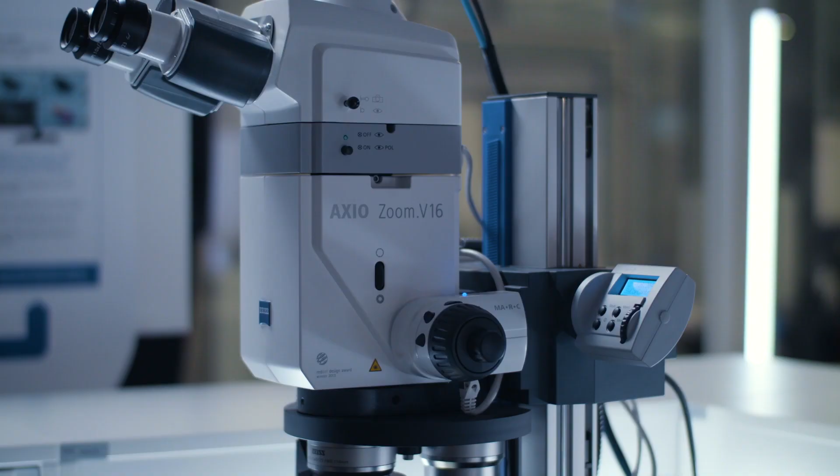In the last 2 episodes, rock number 5 and number 6, we introduced you to the world of Zeiss optics. In this episode, we will focus on the topic of defect detection. To get a better understanding of Zeiss defect detection, today I will talk not to one, but to 2 expert guests. My first guest is Head of X-Ray at Zeiss, welcome Petra Schmidt. Hello Petra. And my second guest is connected with us from the United States, he is the Head of Additive Manufacturing Process and Control at Zeiss, welcome Marcin Bauza.

Hello everyone. Hello Marcin. Marcin, I start with you, what is defect detection all about?

So in mass production, we are creating a lot of parts. It is important to find if all the conditions are met. Sometimes parts may have critical issues on the surfaces or internal issues, and we have external defects or cosmetic defects on the parts. And also we will have functional defects on the parts that could be on the surface or internally.

Okay, well Petra, let's focus on functional defects. What exactly are we talking about? So when it comes to functional defects, they can be actually both on the surface of the part or hidden inside the part. And they influence largely the stability and the lifetime of the part. Very important with functional defects, it's not only to find them, but also to set them into the right context.

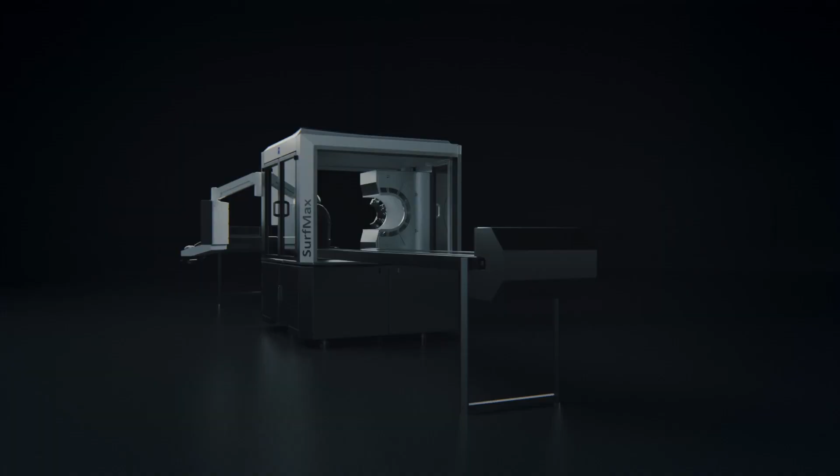So this is Zeiss SurfMax. Marcin, what have we basically just seen? As you mentioned, SurfMax, it's that high-speed inspection of surfaces. We're not measuring the surface, we're looking for surface defects, we're looking for cosmetic appearance, so ensure that the product looks good, and that's the technology that's going to support this.

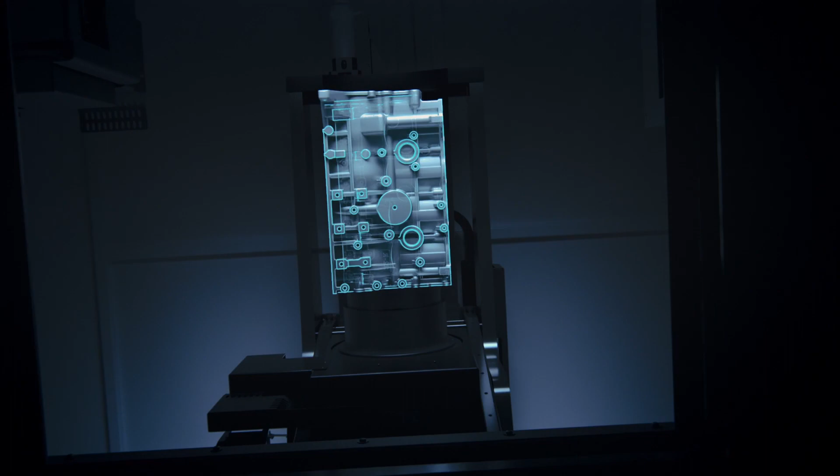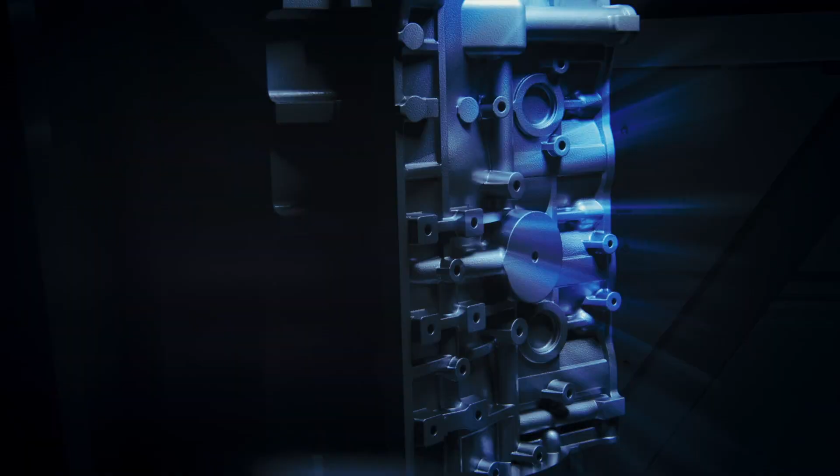Okay, thank you. Well, now it's time to take a sneak peek of the second technology. Zeiss VoluMax 9 Flash. Same question for you Petra, what exactly have we just seen? You have seen the inline solution for large aluminium casting parts, 100% inspection, finding the critical defects in no time.

All right, so Zeiss VoluMax and the SurfMax can let you know if there are any defects on a part. But can they also help you in identifying the type of defect? Well, you hit on a very, very important point, because both solutions can not only find the defects, but they can classify what type of defect it is. As in a 3D volume, for example, pores, shrinkage holes, cracks, and so on.

Marcin, would you like to add anything? Absolutely, as you can imagine, the defects on the surface will be a little bit different. We absolutely can detect many different kinds of defects, but the typical ones are scratches, dents. If you're doing some coating process, those could be fingerprints, also polishing problems, orange peels, and paint runs. And all of those can be classified and named properly.

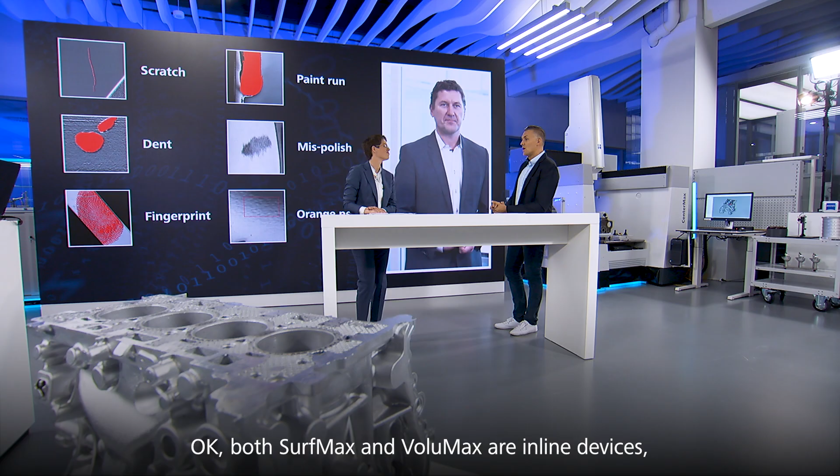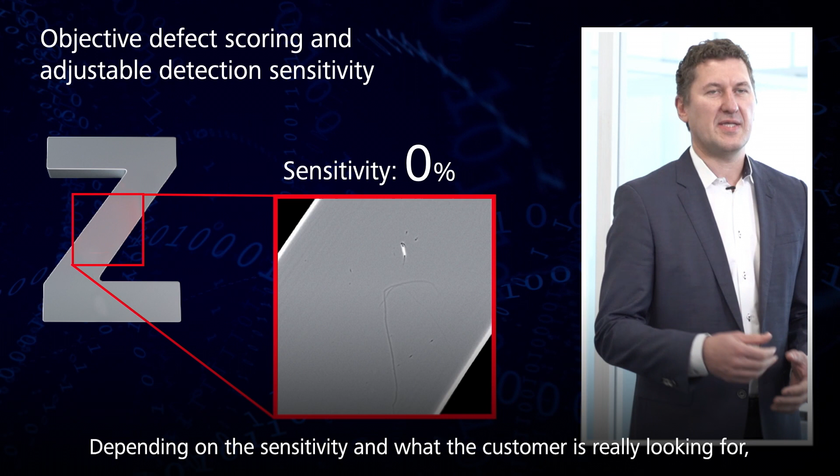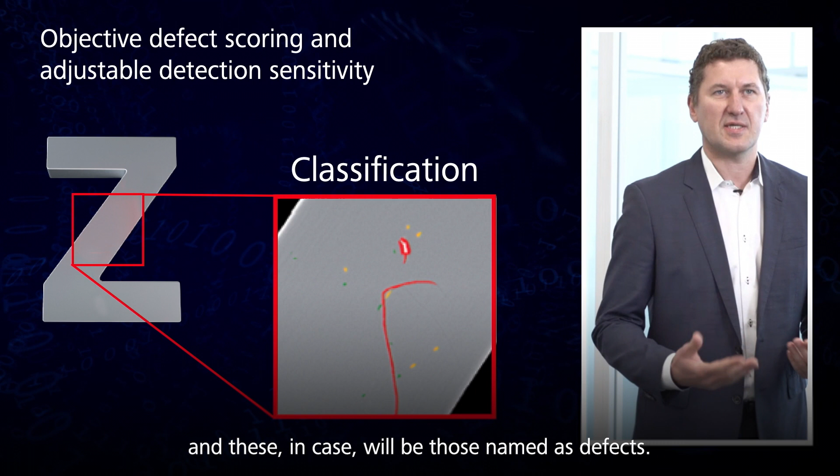Okay, both SurfMax and VoluMax are inline devices. Does that mean that each and every defected part gets automatically rejected? At first we're looking, does the part have any imperfections in the surface? As we can imagine, we can see smaller or larger imperfections, and now depending on the sensitivity and what the customer really is looking for, we will classify them as okay imperfections or acceptable, or not okay imperfections, and in this case will be those named as a defect. And yes, those defects will be rejected and sorted out.

So actually, once one customer told me, until you showed me the inside of my part, I could sleep actually really well. Now that I've seen how many defects are in there, I can't sleep anymore. Luckily, we had a software solution for him for distinguishing the critical defects from the non-critical defects that makes him sleep again.

Okay, but is it absolutely necessary to check each and every part? Wouldn't it be enough to do sample testing? The problem with defect detection, they are typically random. So whether we like it or not, we have to do it at 100%. We have to see every single part. We have to trace down what is really happening. And this is the complexity here.

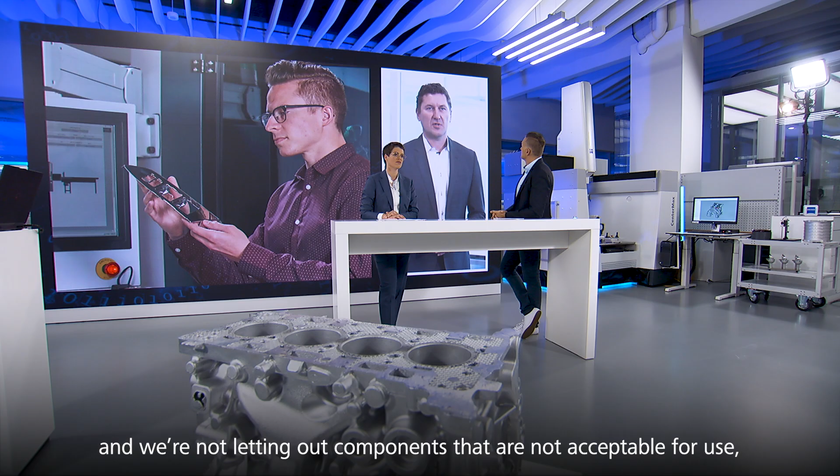And also with defect detection, we need to look at overkill and escape. We want to make sure that we're not detecting something too severely on the parts that are acceptable, and we're not letting out components that are not acceptable for use. So those are the escapes. And also, in a lot of industries, there are actually quality standards that ensure the safety of the product for us as end users.

This is why our customers really inspect 100% of the parts. In addition, once you learn something about the defects in your part, you can also improve your production process to produce fewer bad parts. That means early detection of defects, less scrap, reduction of costs.

Okay, well, all of this makes sense, but isn't it very time consuming if you control and inspect every part? One would think that this would slow down the entire production process, which is the last thing you want. The production cycle time is given, and we find a solution for the customer that inspects the product within the cycle time.

Martin, anything to add? As Petra mentioned, the inspection already is happening. There is a certain time slot, and today visual inspection is already performed by different means. What we're adding here is the ability to do it digitally, to record the results, and to be able to compare the entire batch runs, and that's the additional benefit. So there's no add-on of time.

Okay, well, Martin and Petra, thank you very much for this first round of explanations. Now it's time to take a closer look at Zeiss SurfMax.

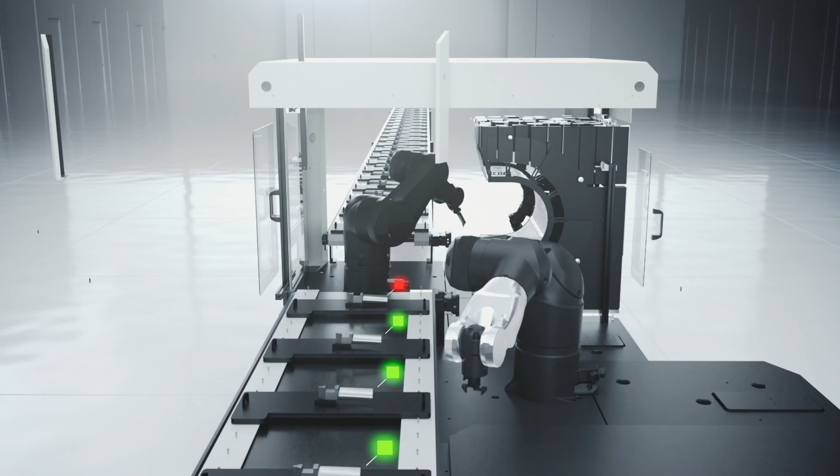Martin, you're the head of this field of business. So what about this product makes you particularly proud? This was not simple. We had to create very specific hardware, but we also had to create very impressive software. It's not only the accuracy of the software, but also the extreme speed required to provide information in real time. Okay, well, now it's time to see SurfMax in action.

And for this, we have sent our demonstrations chief, Jay, to the United States, where, along with Stephanie, he has recorded a demonstration video. Let's watch it.

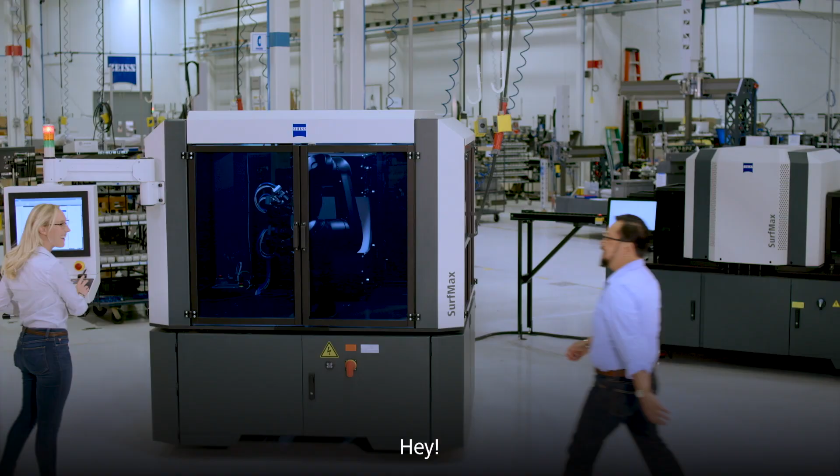Hey, Stephanie, how are you, my friend? Great. How are you doing? I'm good. It's good to see you. Welcome. Thanks for having me. It's good to be home.

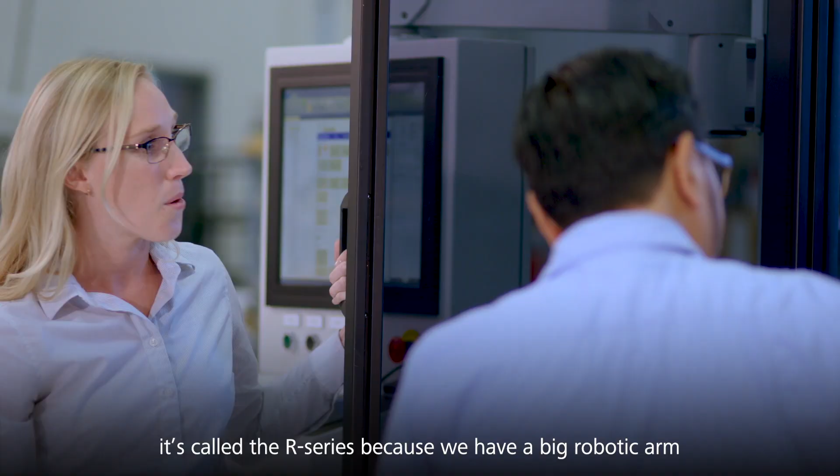Let's start at the beginning. What's your name? What do you do? Sure, I'm Stephanie Kobayashi, and I'm the SurfMax product manager here in Maple Grove, Minnesota. Right behind us, this is our R series. This is our R150 system. And if I open it up, it's called the R series because we have a big robotic arm integrated right into the system. So this helps us with part handling.

Sure, and I see you painted it black to make it look cool. Yeah, that's right. So we specifically use this system for parts that have very complex sorts of geometries. The example we'll cover in a little bit here is this orthopedic knee. Okay, so I see that there are two different kinds of machines.

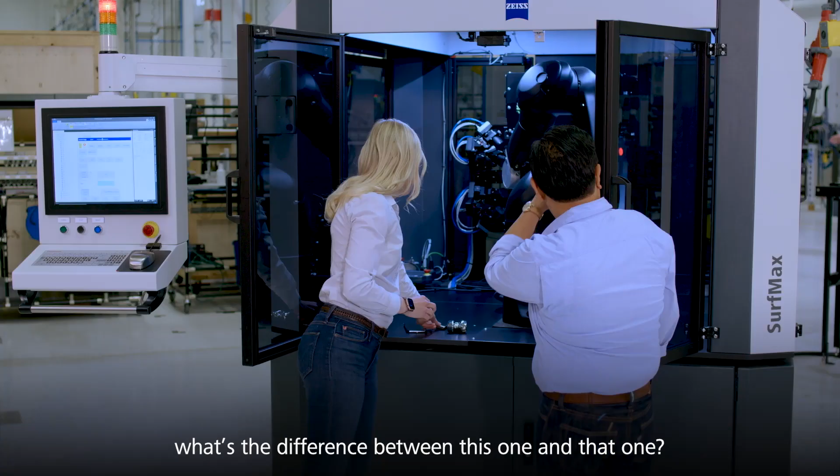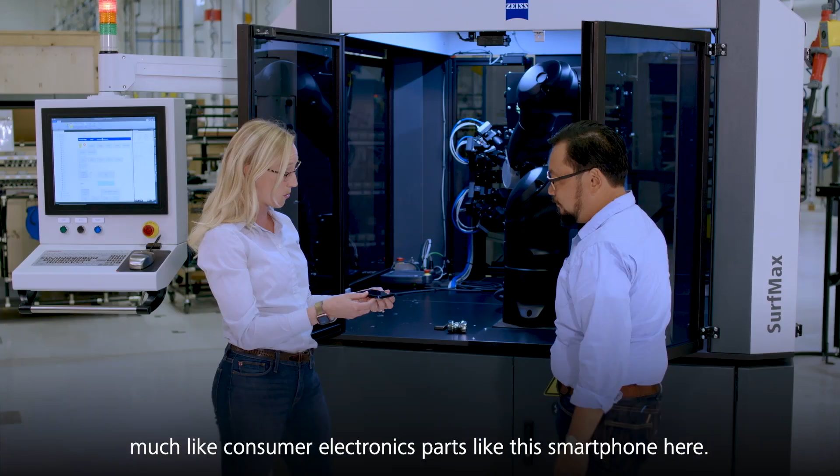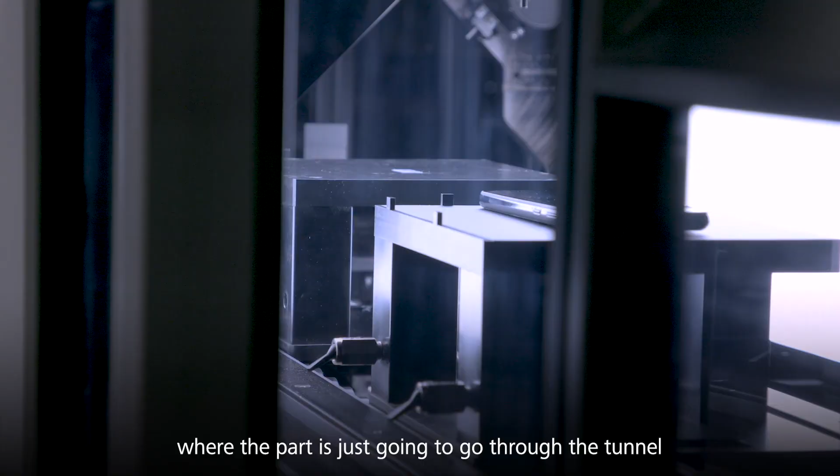What's the difference between this one and that one? So the other system is our S series, and we use that for flatter, more planar types of surfaces, much like consumer electronics parts, like the smartphone that we have here. The S on that system stands for staging system, and it's a very high throughput system where the part is just going to go through the tunnel rather than being picked up and manipulated with the robotic arm. And so again, that's looking for different types of defects on the surface, right?

Yeah, that's right. With consumer electronics parts, oftentimes we're really concerned with cosmetic types of defects. You wouldn't want to get a new phone, open it up, and see a big scratch on the surface of that. When we're talking about airfoils or the orthopedic knee, we're more concerned with functionality of the parts. So that's a little bit about what we do.

How do we do it? Yeah, so we use Zeiss optics to image our parts, which is not new for Zeiss. We've done it for a very long time and we do it very well. But what really makes this system unique is that we package it with in-house developed software and algorithms for defect detection. So we're really getting the full package for reliable defect detection.

That sounds awesome, but it sounds like it takes a lot of time. What's the cycle time on these guys? You would be surprised. For the smartphone we looked at, it could just be a couple of seconds to meet that cycle time. So really quick, and for something more complex, like the orthopedic knee, we're talking maybe 60 seconds, around a minute.

60 seconds for an orthopedic knee? That takes me usually about 30 minutes to measure. I am dying to see it. Yeah, thanks. All right, we'll go ahead and get this started.

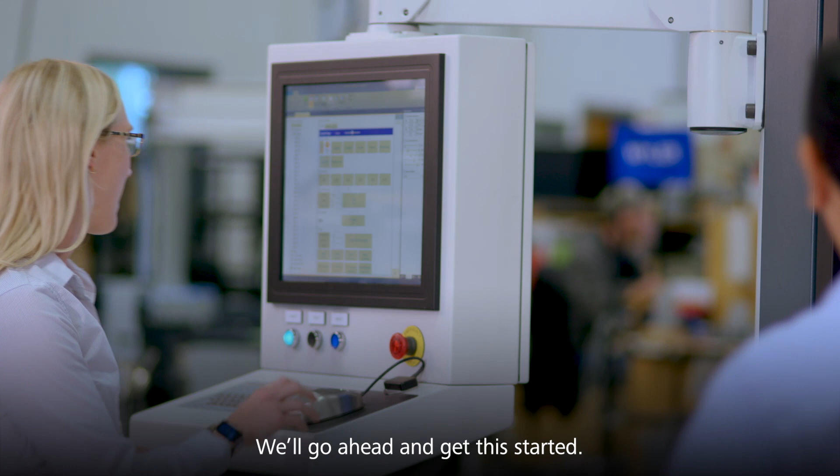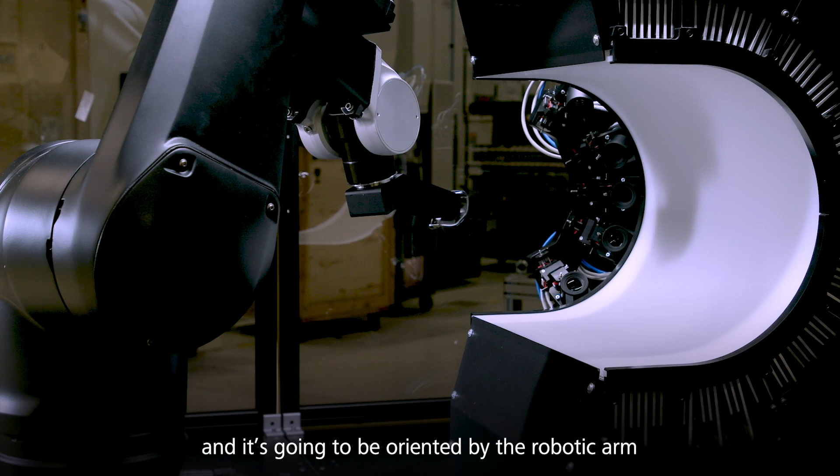So I'm just starting the acquisition, and the part is picked up. It's going to be oriented by the robotic arm in a number of positions in front of that ring of cameras we can see in the back. We're taking about 65 raw images times 5 cameras, so about 300 images total.

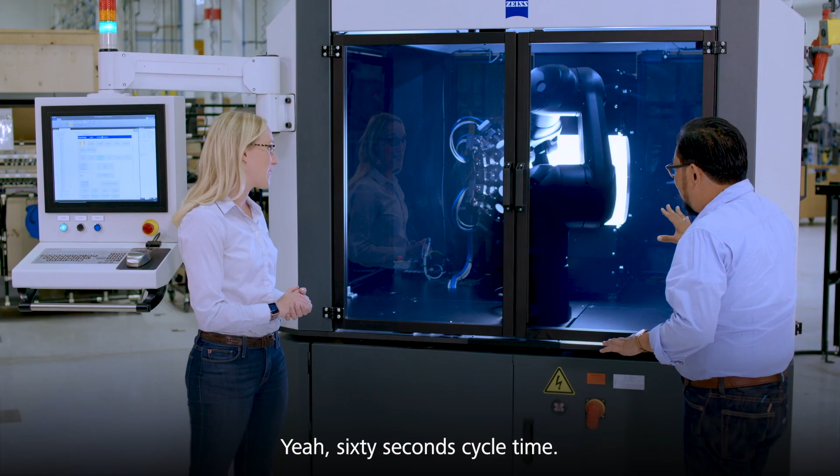So you're picking up this part in a span of 60 seconds, right? Yeah, 60 seconds cycle time. You're able to capture about 300 images in that short amount of time. That's right. Let me show you what we do with those images once acquired.

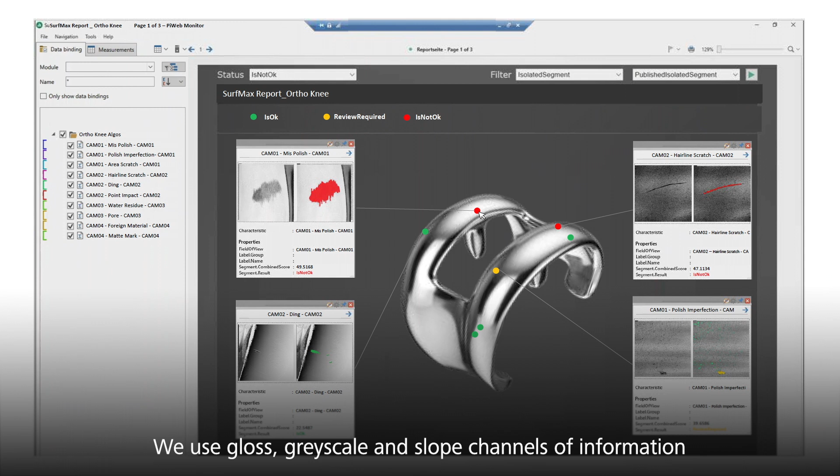The SurfMax has acquired a number of images for us, and we can analyze these on a number of different channels. We use gloss, grayscale, and slope channels of information to detect certain types of defects. And what we're able to do is use PiWeb to look at these defects.

So shall we take a look at the part? Yeah, let's see it.

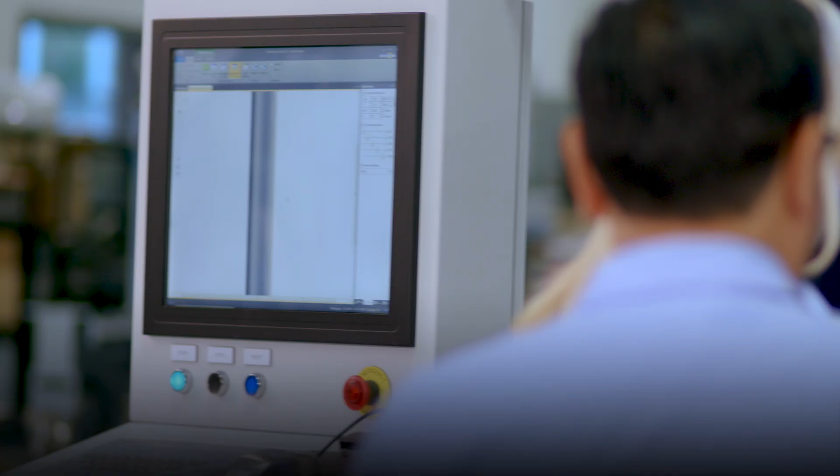All right, so on our report, we can see about here, there was a defect on the surface. It's definitely hard to see with the naked eye, that's for sure.

Well, Stephanie, that is crazy. It's amazing, this is definitely a world that I'm not used to seeing at all. Thanks for showing us, this is really new stuff, right? Yeah, absolutely, I have questions, I'm sure others do too.

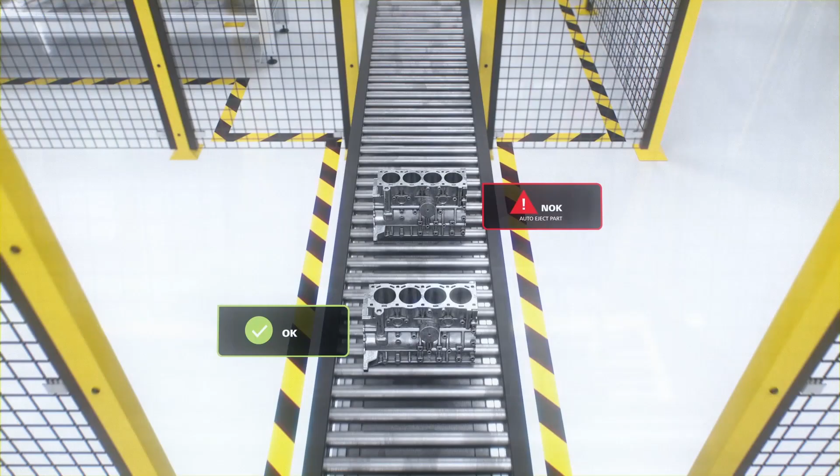Petra, before I asked Marcin how proud he was of his product, so same question to you. What about you, how proud are you? I'm particularly proud about the team that developed that product, because it's helped our customers save a lot of money.

It makes it possible to detect defects early on, so the customer isn't wasting resources or money in further producing parts that in the end won't do the job. We had one customer use case where the entire solution amortized within the first year. So ROI in less than one year. Absolutely, wow, that's the dream of every customer.

But I know there are even more benefits, especially when we think of the combination between Zeiss VoluMax 9 Flash and the new Zeiss automated defect detection software. Am I right? You're totally right.

Typically you have the trade-off: either a small part with less material that you can inspect very fast, or a large part with more material that typically takes more time to evaluate. Now with that solution, it's actually possible to achieve high throughput also for the large parts with more material.

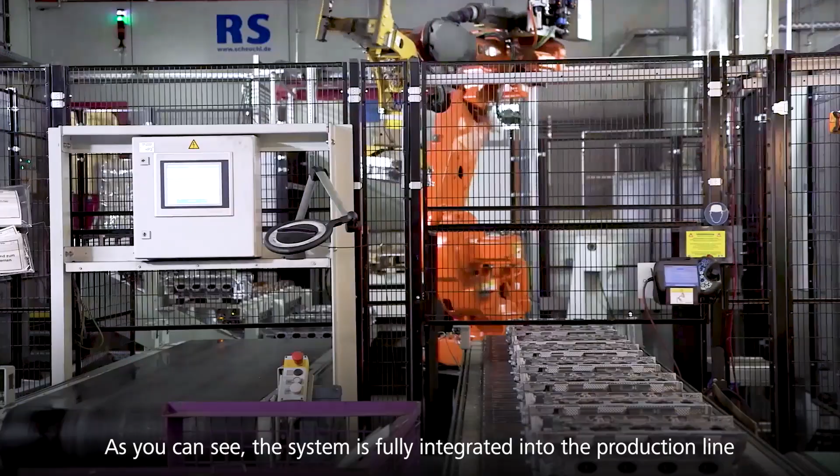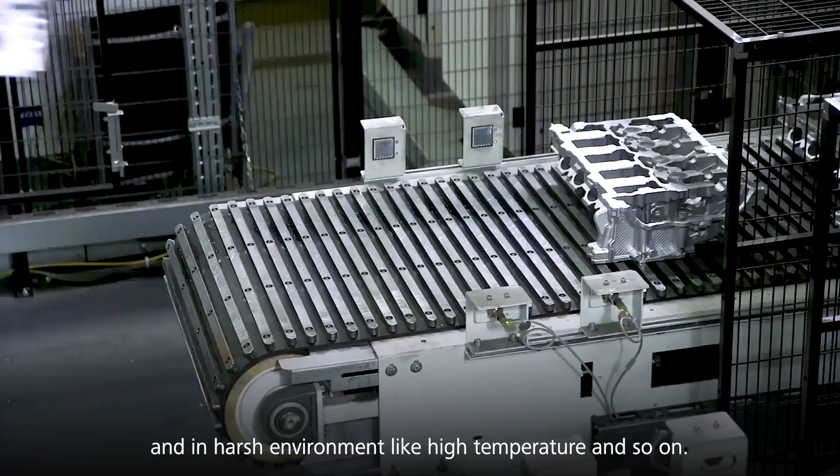Let's start with a short video so you get a first impression of how our system is used at the customer side. As you can see, the system is fully integrated into the production line and can work fully automatically. It's designed to run 24/7 in a harsh environment, like high temperature and so on. For example, one of our customers scanned 1,000 or even more parts per day. So I think that's a lot, and I'm still excited to see the systems running. That is a lot.

1,000 parts per day, that's a pretty intense piece of hardware. Does that have something to do with that large detector Petra was talking about? Exactly. With the in-house developed detector, we now have more possibilities to scan bigger parts like the engine block in a faster way. Compared to our smaller detector, we are now 30% faster. That is a huge improvement.

Now, I know from my days as a product manager, sometimes with really intense hardware you need really intense software to manage that. So with that type of throughput and those big detectors, you must have pretty impressive software to power that, right? Exactly. When we talk about the Zeiss automated defect detection, from my point of view it's a real game changer. I'll tell you why, but first let's show you the challenges of such an evaluation.

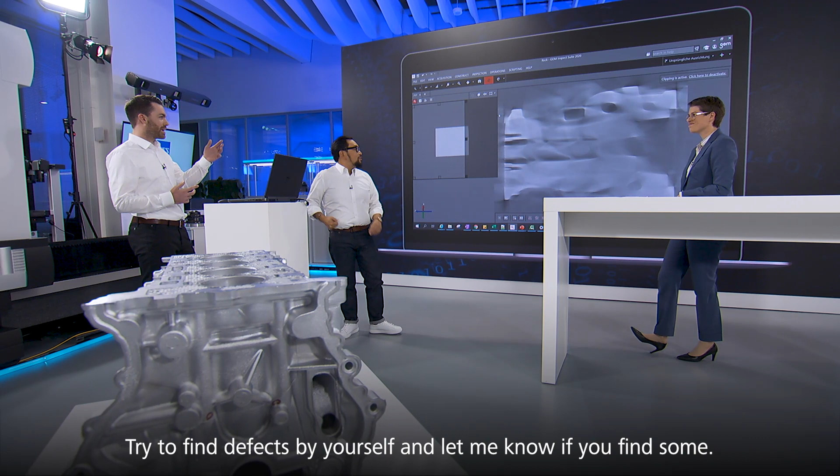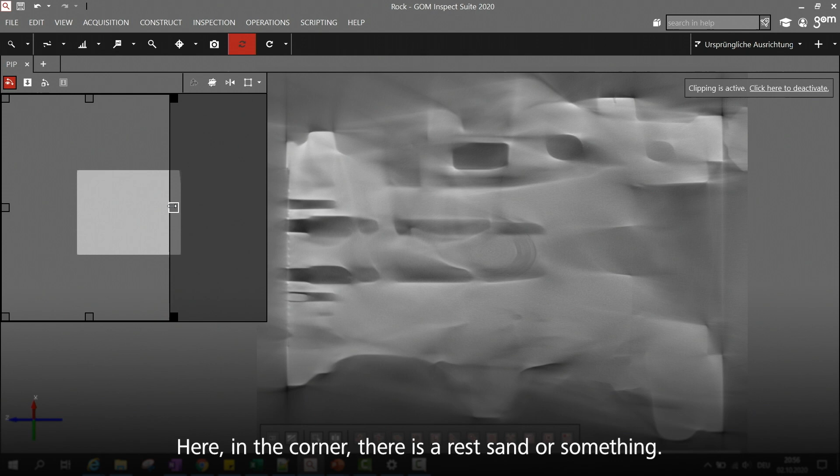Therefore I prepared a scan part, and let's try to find defects yourselves, let me know if you find some. You're going to have to help me. There's a lot of scatter, so it's tough. Maybe you can see here on this side, on the upper side. Yep, I see that there's something that could be a defect. Exactly. Is there anywhere else in here? And here in the corners, there is a rest sand or something. Sure, that looks like it could be something.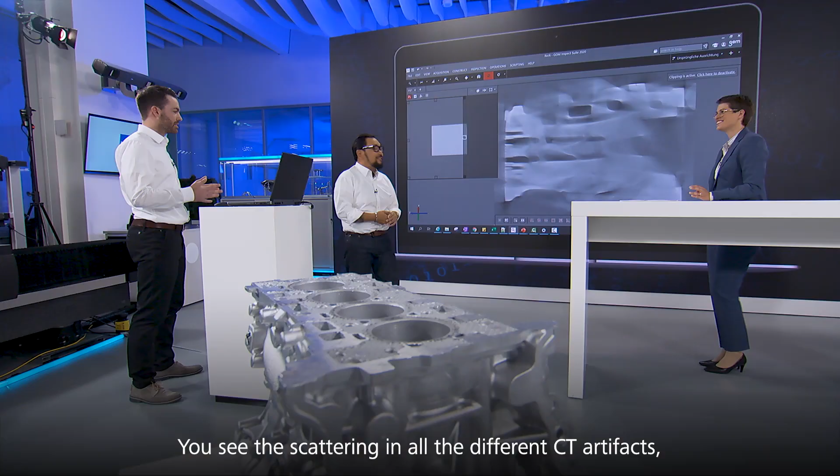As you can see, maybe it's not as easy as you thought. At first, really hard. Yeah, especially if you don't know what you're looking for. Exactly. You see the scattering and all the different CT artifacts, but that's not the problem.

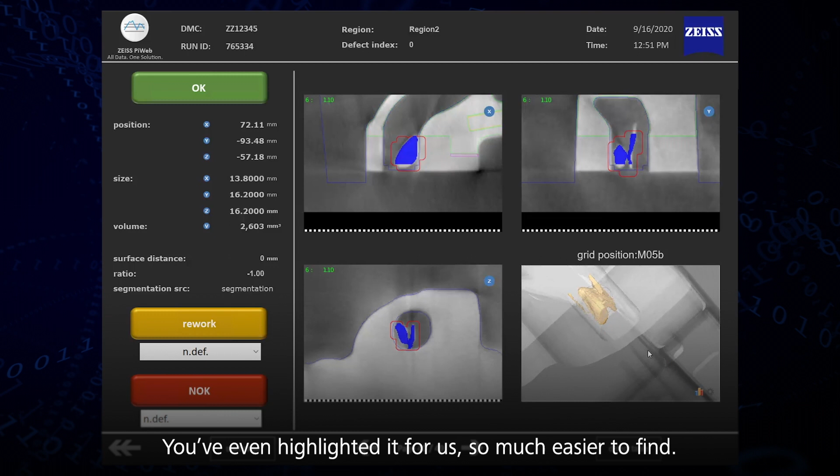Can you show us on our software? Sure, I will show you that. Oh wow, that's really clear. You even highlighted it for us. We are not focused on image quality, we are focused on performance.

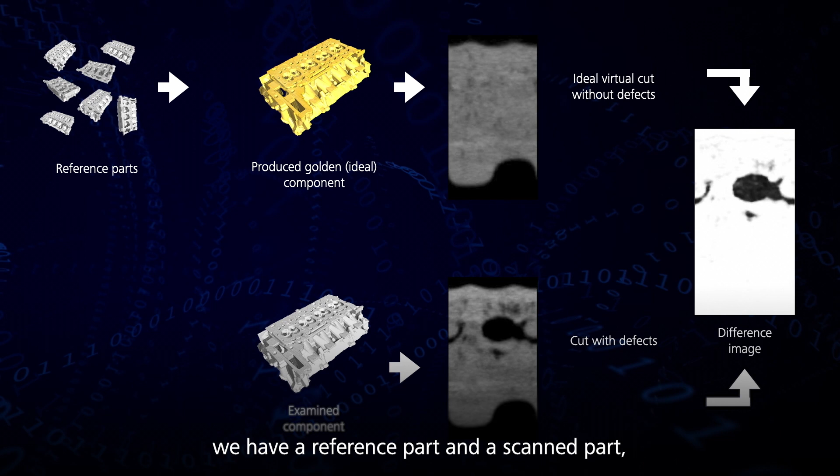For this, we use a training approach where we scan 20 to 25 good parts and collect features during this process. This allows us to calculate a reference part, or so-called golden part. At the end, what you see here is a reference part and a scanned part, and we see the deviation, which is the real defect we want to see.

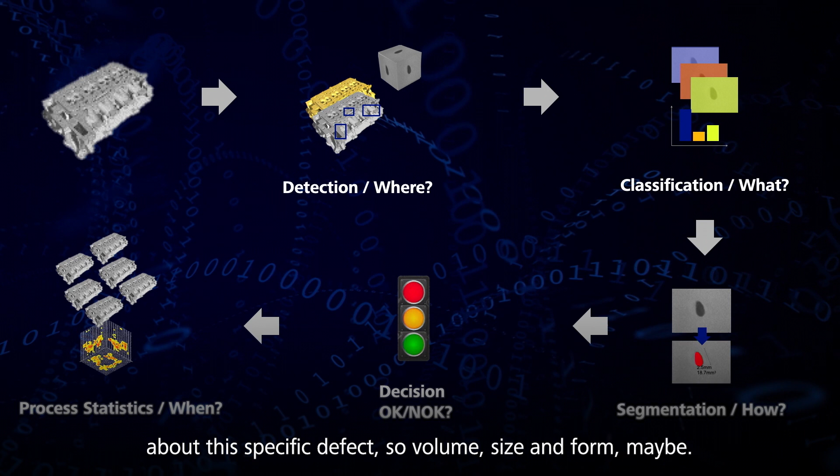But that's not all. When we talk about the whole process, the Zeiss automated defect detection is a combination of artificial intelligence and an easy-to-adapt decision scheme. First we want to detect the defect. Second, we want to know the error class - is it a pore, is it a rest sand? And third, we want more information about the specific defect, so volume, size, and maybe the form. At the end, with all this information, we can decide if this is an okay part or not okay part, and pass it through to the next processing step.

Last but not least, we can input all the collected information into our PiWeb, and you see we have different report possibilities based on customers' needs, and I think this is a great benefit for our customers.

A huge benefit. So if I'm hearing you correctly, what we have is a marriage between really intense, state-of-the-art hardware wrapped in a package that's shop floor hardened, with some pretty intense software to help you cut out the noise and decide what is part and what is noise, and then really good artificial intelligence to help you decide what is good and bad - all in one package, a one-stop shop that we can deliver to our customers by Zeiss.